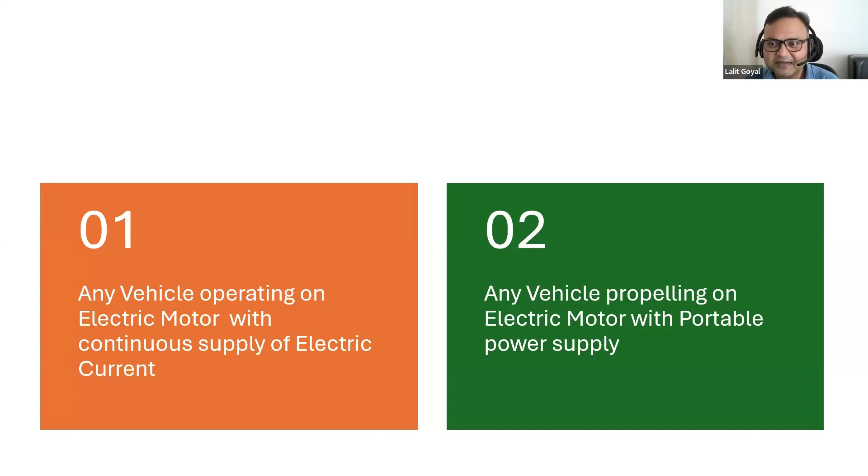Just understand, in physics, definition is definition, right? And the definition says any vehicle operating or propelling on a motor is an electric vehicle. That's how physics is, so the concept remains concept. Electric vehicles are there, and when they came to India, I'm giving you four options.

So this was the first electric vehicle which traveled in India. Now you have to guess. We don't cut any marks for guessing, so everyone is free to guess. Let's see.

Excellent. 1912, okay, excellent. Yeah, it is in Mumbai, that's true, it's in Mumbai. 1925? Someone has gone through Google, right?

Now, what is the limitation of these vehicles? How many of you can own them? I hope a lot, right? The challenge is they require a continuous supply of electricity. If you see the fridge or AC in our house, we give continuous electricity supply by connecting them to an electric source. So here, to give the electricity, we have to create an infrastructure, and that's costly. That's the reason everywhere in the world, governments own these vehicles. We can't own them.

So to surpass this limitation, what can you do? If you replace continuous power supply with portable power supply, can you do it? We have done it in telecommunication. Remember, till some years back we had phones with wired lines. After that, what did we do? We powered those phones with batteries, and today we have mobile phones.

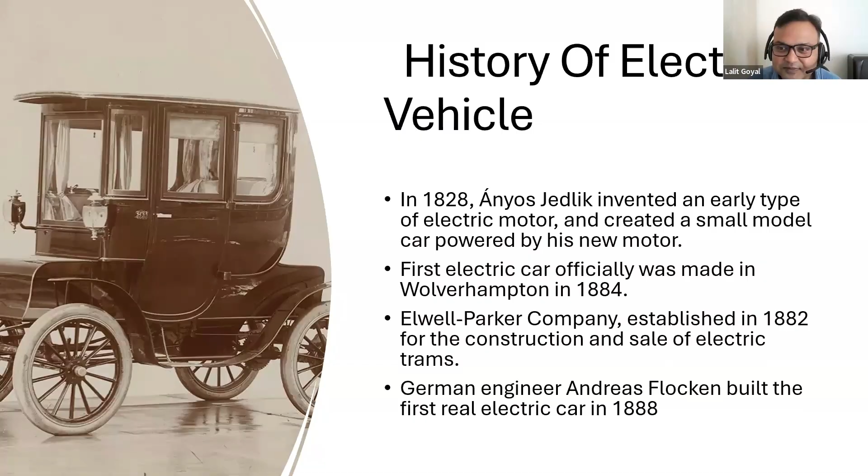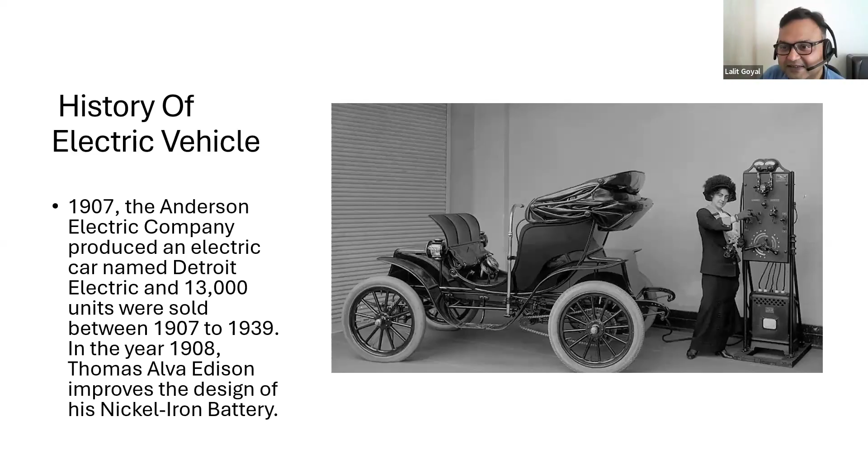So why we are moving to battery electric vehicle and why it's a future? Because a lot of challenges will come to your mind. Let's take a simple thing. Why electric vehicle, according to you, has made a comeback? Because some myths must be clear. A lot of myths are gone, right? Technically, you say electric vehicle, but it is a battery electric vehicle. We'll discuss that. And whatever training we do in battery electric vehicle or hybrid electric vehicle - electric vehicle is not our domain, yes or no? But we will say electric vehicle, right?

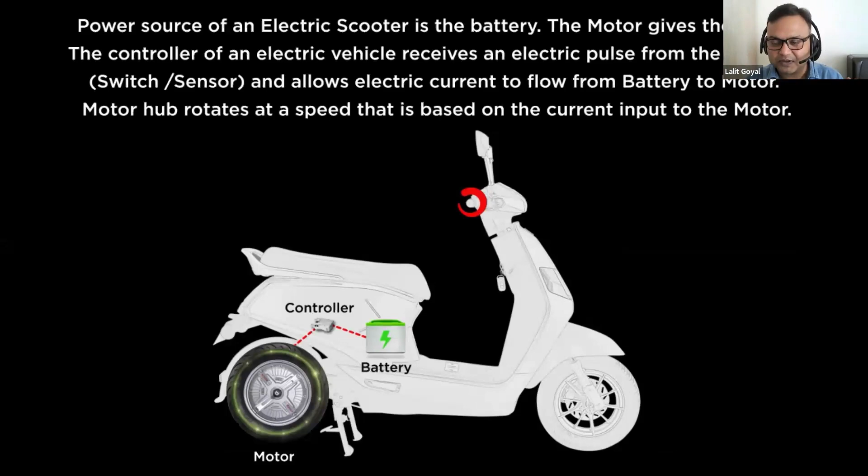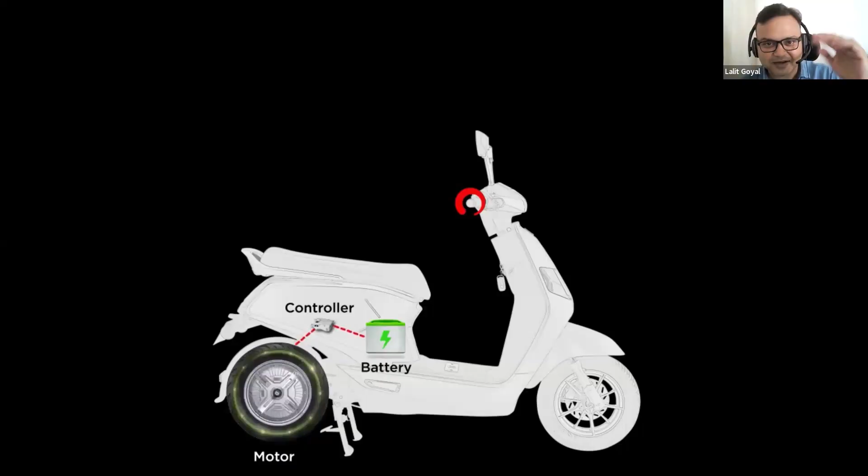Now let's understand what are the new age battery electric vehicles, and this video will technically help you understand where we are and what we are going to do. So I'm sharing this video with you. This is a battery electric vehicle from Mercedes.

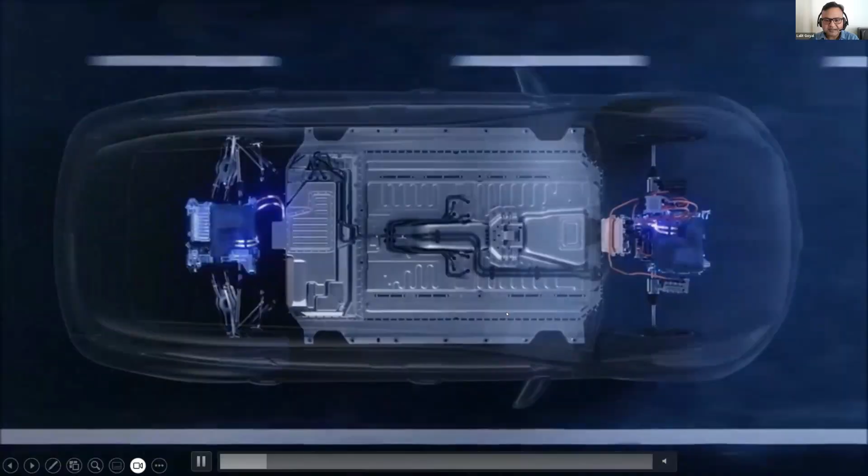Battery electric vehicles have electric powertrains, and the core component is the motor, which is there right now. This motor is powered by the battery pack. There's a cooling mechanism to control the temperatures, because when you use electricity, a lot of energy is generated, and with that, a lot of heat is generated. So we have a cooling mechanism to control the electric powertrain as well as the battery of these electric vehicles.

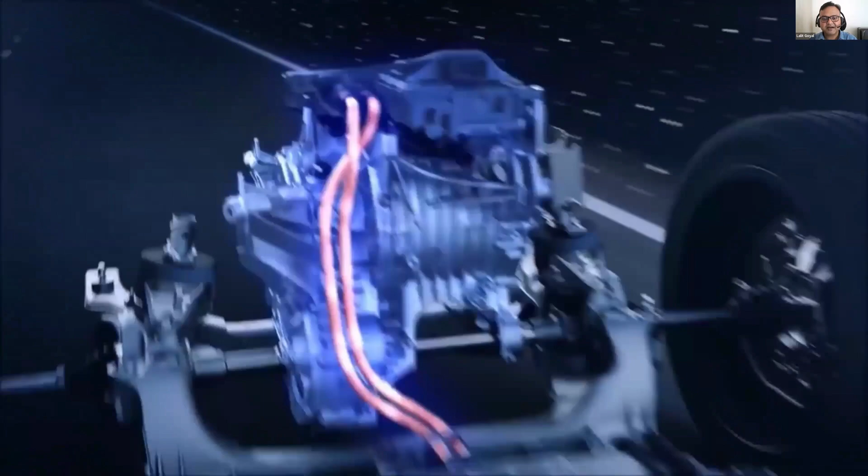So these vehicles today have reached a big level of maturity. Not only are they designed like this, even the battery which is placed there is placed in such a way that it lowers the centre of gravity of the vehicle. This electric powertrain has two motors - one is the front wheel drive, one is the back wheel drive. Combined together, it becomes all wheel drive.

And the best part is that you drive and you generate electricity also. There's a feature called coasting. When you do coasting, you can see around the vehicle is generating energy. So regenerative braking as well as coasting helps you recoup that energy and save it to charge the batteries. So even a loss of energy is harnessed.

These vehicles come with different cooling and heating mechanisms, and you can also select from different modes. So these battery electric vehicles today are coming with the most advanced technologies. Even if you see, to drive, you have acceleration 10 times more than your internal combustion engine. So these battery electric vehicles have new age technologies.

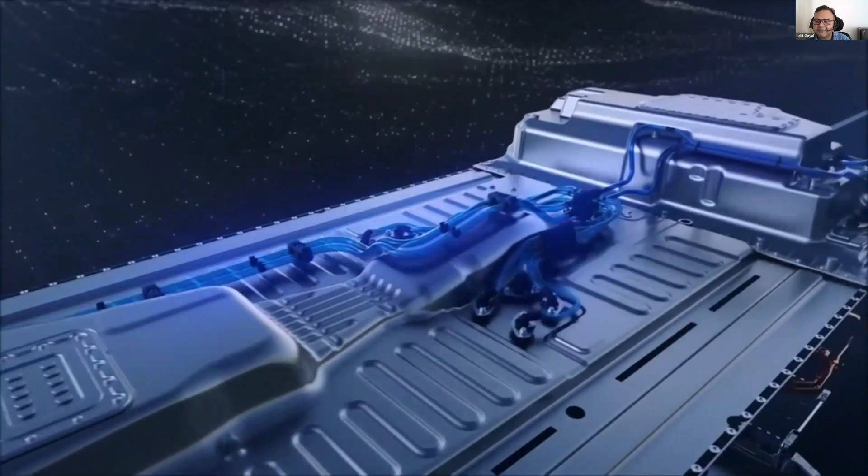So battery powertrain as motor, and we have today advanced features which technically use connected features for these vehicles. Now let's talk about the components. So it has a battery. To manage that battery, it has a battery management system. Charge port, because the battery requires current - in charging, we'll understand what is charging today. There are contactors for safety, a motor to propel the vehicle, and a motor controller.

How do you convert AC to DC? Every one of you has a battery at home, right? So when the electricity is there, the battery is charged, technically converting AC into DC. When the electricity is not there, what will happen? The battery is used to give you energy. But which component does that?

Which component does the conversion? It's the inverter, right? So at your home, have you ever wondered, the electricity supplies 230 volts, the battery's charge is 12 volts. So how does that 12-volt battery technically address the gap of 230 volts? No problem, we'll discuss that. And how your mobile technically charges with a 5-volt charger - that's all coming to you.

So let's start with a hybrid electric vehicle. So you all have eaten hybrid tomatoes, right? Yes or no? Hybrid tomatoes. What's the difference between a tomato and a hybrid tomato? Is there a difference? A bit, right? Not more, right?

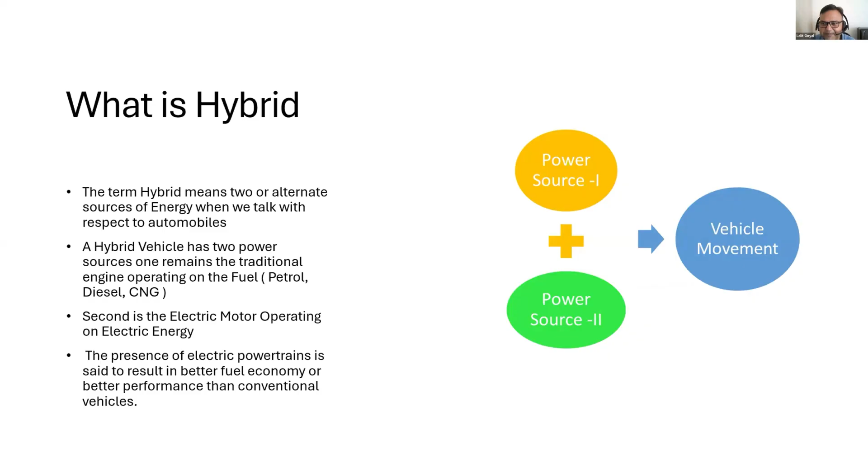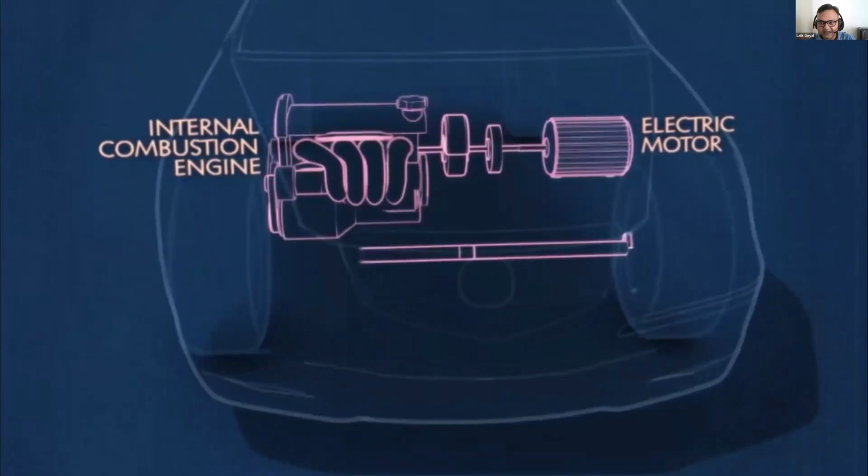Let's talk about hybrid electric vehicle. A hybrid electric vehicle technically has two powertrains. That means an electric powertrain, which is a special one - it takes energy from the battery, goes to the motor, and propels the vehicle. Second is the internal combustion engine, which converts chemical energy to mechanical energy to propel the vehicle. So when we say hybrid, it has two powertrains - you can see internal combustion engine as well as electric powertrain, with a lithium ion battery to it.

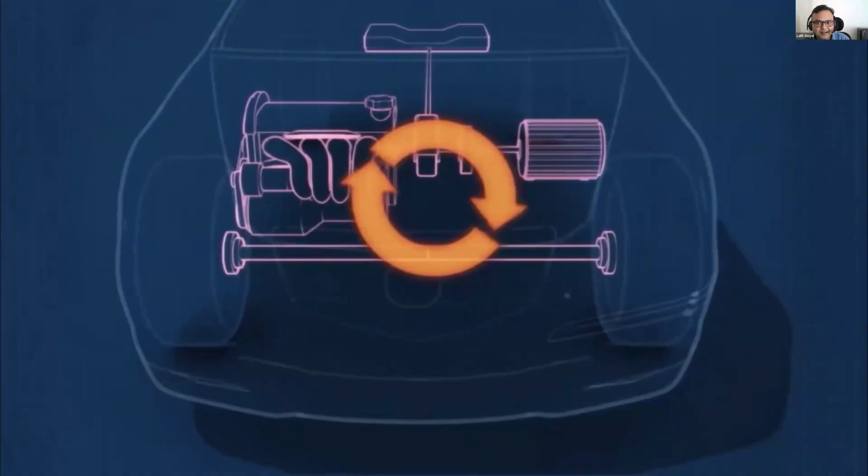Now, when you start your vehicle, there is a starter generator or alternator - technically that's a motor only. The battery of these hybrid electric vehicles has a very unique thing - it can be made mostly of lithium ion cells only. Today you will understand what lithium ion cells are. This battery is very unique because it is charged only by the engine. You can't do any home charging to it - maybe AC, maybe DC, you can't do any sort of charging. The engine charges the battery.

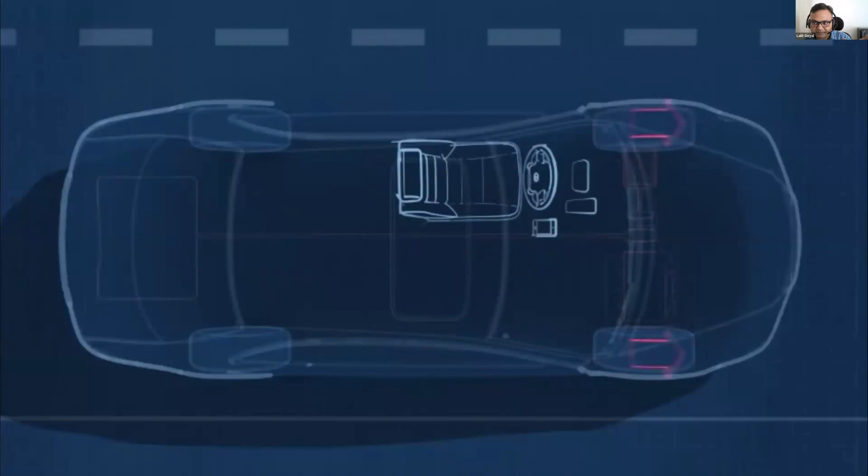Now let's understand the working principle - that's a very interesting thing. So the vehicle will start, right? The engine needs cranking, so your vehicle alternator does that when you start the vehicle. Here you have the electric powertrain, a motor with electric powertrain. So remember, every time the vehicle starts, it will start on electric powertrain. Point number one. Point number two, electric powertrain is 1/10th of the internal combustion engine, to make the vehicle stability more. Now these have a principle of working - if you see hybrid, you can't drive the vehicle at 100 km per hour. Different OEMs have set the limit of maximum range you can go - 3 kilometers, maximum speed 20 kilometers.

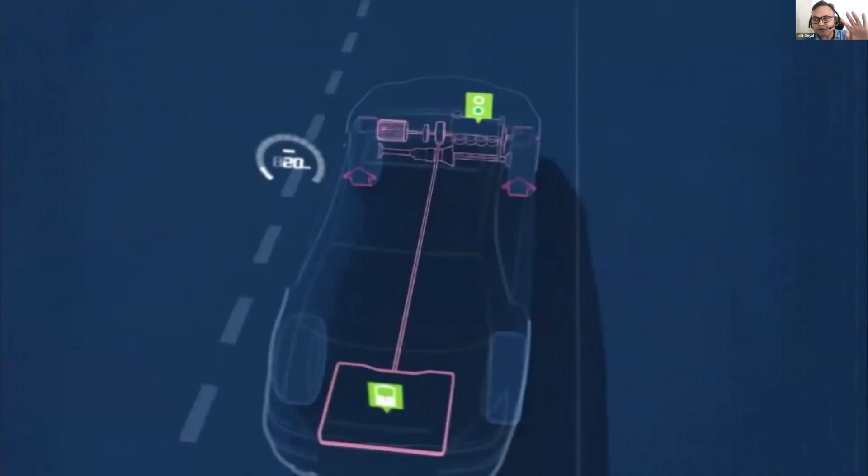Now let's take Toyota as an example. Here you are driving the vehicle - initially, the vehicle starts on electric powertrain. Once you cross 3 kilometers of range or move above 20 kilometers of speed, or the battery goes down, what will happen? The engine will take over. Now you can see the engine is propelling the vehicle as well as charging the battery, and when you require more power, you can combine both.

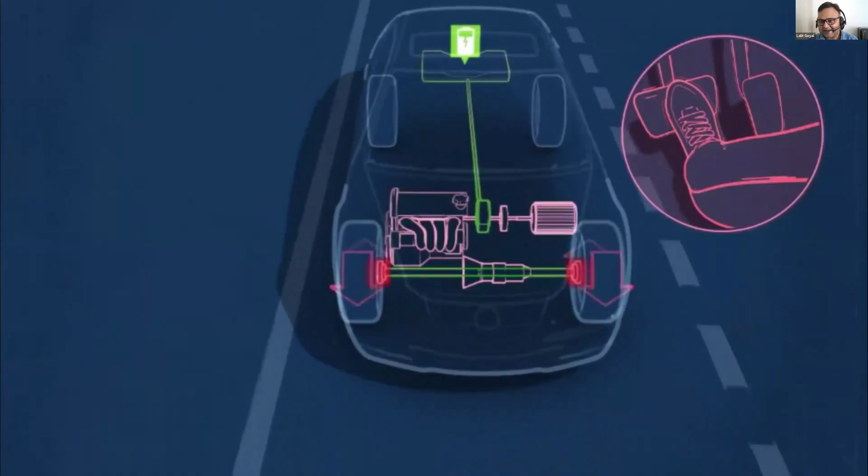What is regenerative braking? We are not talking about motors today, but the reverse of a motor is a generator - as simple as that. So regenerative braking technically helps you convert the lost energy into electrical energy, enhancing your energy while driving. So that's hybrid for you - it reduces the emission and addresses all the challenges that you have with battery electric vehicles. Any questions here?

Then hybrid, then we'll move to plug-in hybrid. Right. Right.

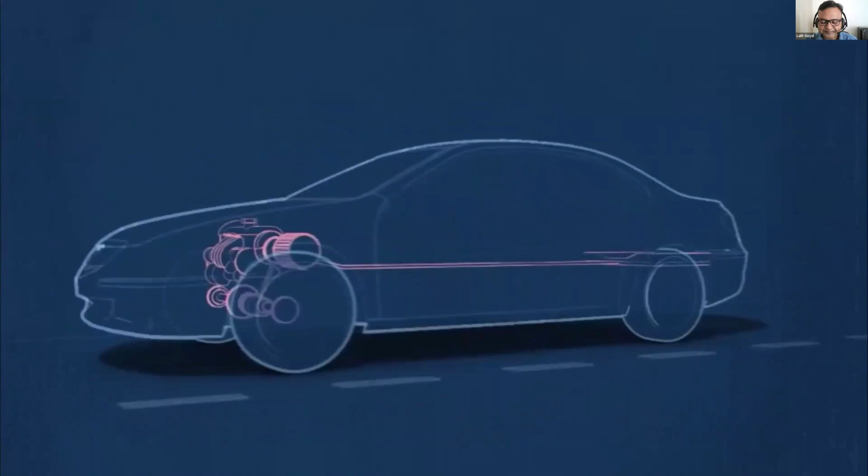Now let's talk about the second component, what we say is fuels. In hybrid, you have three different levels. So micro hybrid - have you ever heard the term micro hybrid? Today we have starter generators which technically aid the vehicle start and stop, reducing emissions by about 10%. Have you heard the term SHVS - smart hybrid by Maruti, smart hybrid by Suzuki, or smart hybrid by Mahindra? There you have a starter motor which technically supports the vehicle with engine start and stop, then regenerative energy as well as boost, because a motor always has better torque compared to an engine. So when you use motor torque aligned with the engine torque, you get a better torque, or we say refined torque.

And finally, the full hybrid vehicle where you drive the vehicle, regenerative braking, start and stop of engine. So now you understand why in a hybrid electric vehicle it will only start on electric.

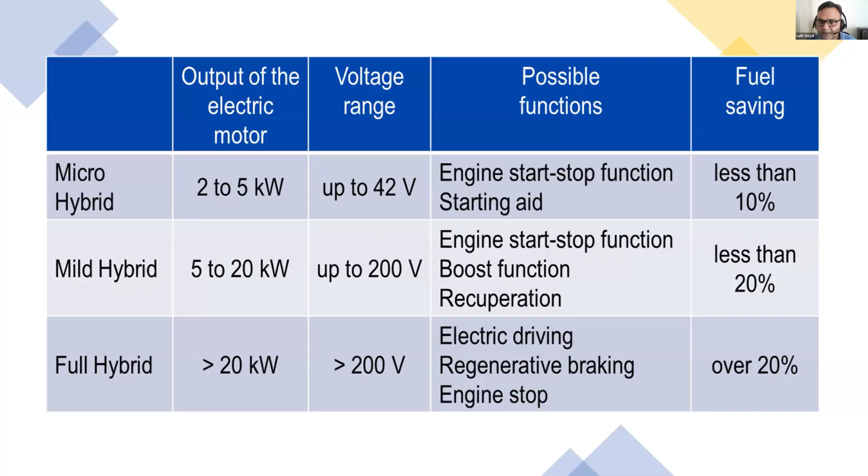The second is plug-in hybrid. In simple words, you have a lesser battery which can be charged by the engine. But if you increase the size of the battery and charge it by engine, there will be more effort and issue with the engine, so engine power will go down. So we do plug-in hybrid: you increase the size of the battery and the powertrain to be equal to the electric internal combustion engine. What you want to do is charge these batteries from an external power source, and these are called plug-in hybrids.

So plug-in hybrids are just like hybrids, but the difference is they are costly. Why? Because the battery size they have is equivalent to a battery electric vehicle. This Kia plug-in hybrid has a 20 kilowatt battery pack, while the previous car was having a 5 kilowatt battery pack.

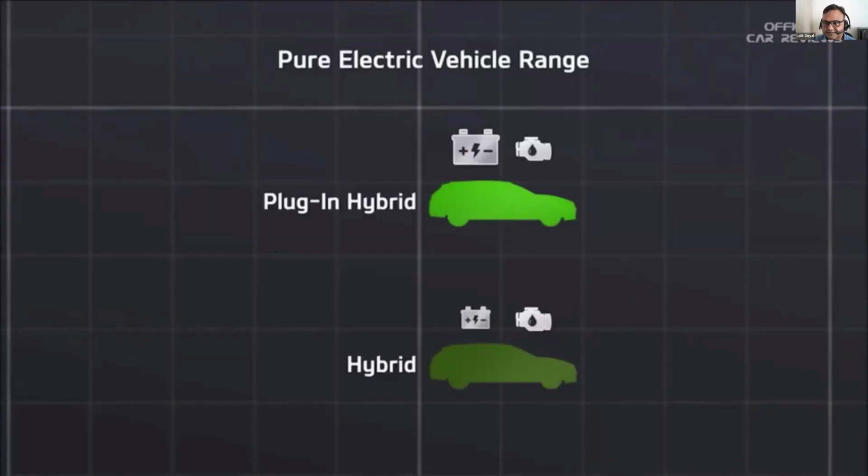So that means if you can drive 5 kilometers on hybrid, in plug-in hybrid you can drive for 50 kilometers. In hybrid you had a limitation of going up to a top speed of 20. Here you can go up to 50 kilometers and drive at 100 kilometers per hour.

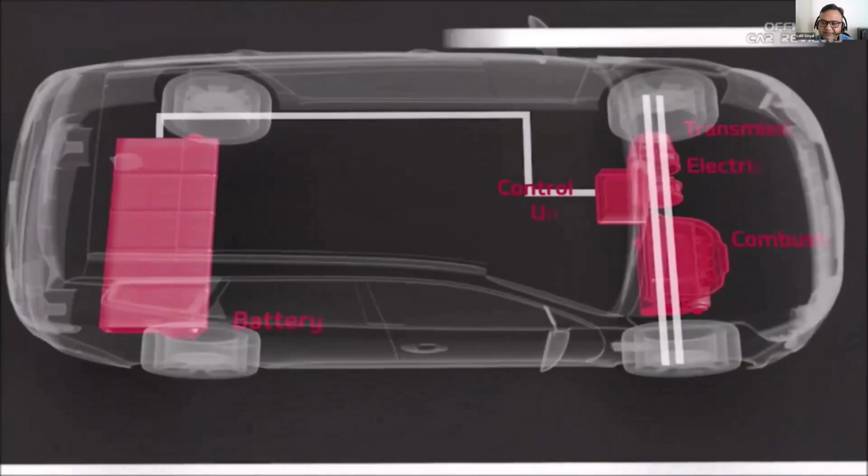So it's more of a battery electric vehicle coming with an engine which supports you during a breakdown. Rest everything remains same. These vehicles behave more like a battery electric vehicle than an internal combustion vehicle. The engine only comes into picture when the battery goes down, or you need torque assist. So it behaves more like a battery electric vehicle compared to hybrids, and that's why we call them plug-in hybrids.

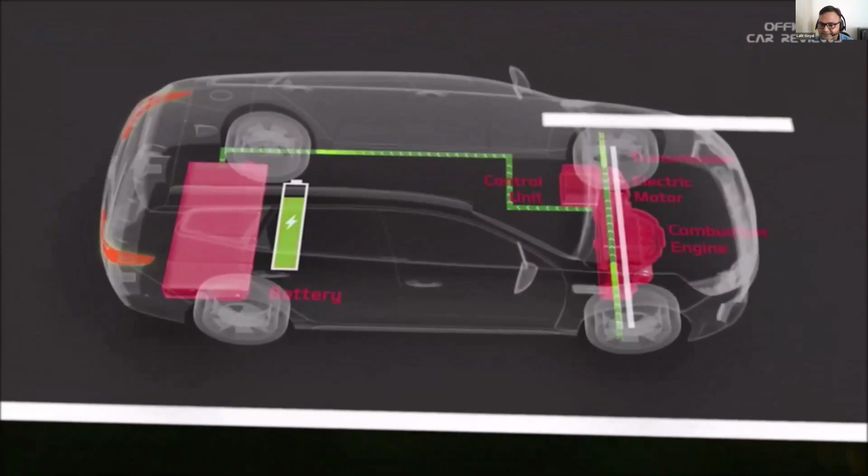Now here you can see the battery has gone down. The engine is propelling the vehicle as well as charging the battery. So that's plug-in hybrid for you.

And you can charge these vehicles from the 15 ampere sockets that you have at your home. Do you know 15 ampere sockets? You put the air conditioning system and refrigeration on that. So you can charge by that, as simple as that. Or you can do public charging as well.

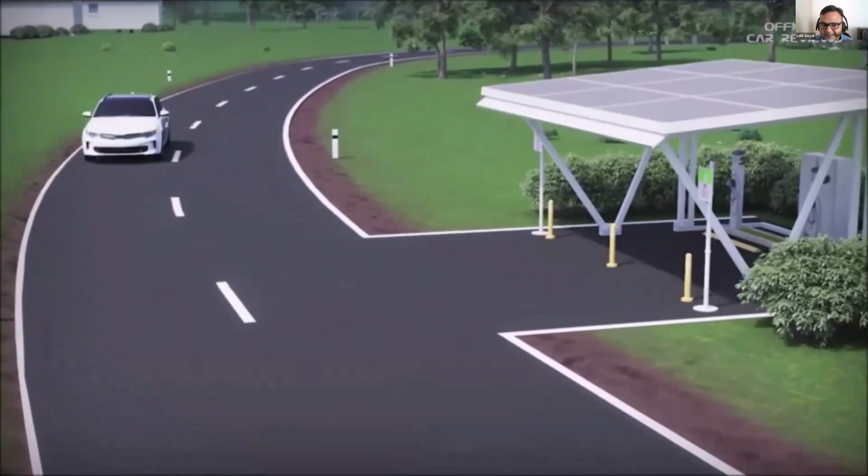Now let's move toward energy which is 100% pure and clean. Let's talk about fuel cell.

You have heard about hydrogen vehicles? A lot of hype, and one of the ministers in India is driving that — the road minister who always says something. Now, hydrogen is readily available everywhere, plenty of it, but not in the pure form. Where do you find pure hydrogen? The Sun. If you have pure hydrogen on Earth, the temperature would be somewhere around 17,000 degrees. A challenge? Hydrogen is highly flammable, that's the reason it's not available in the purest form.

But H2O is hydrogen plus oxygen. Now this energy is the cleanest energy on road.

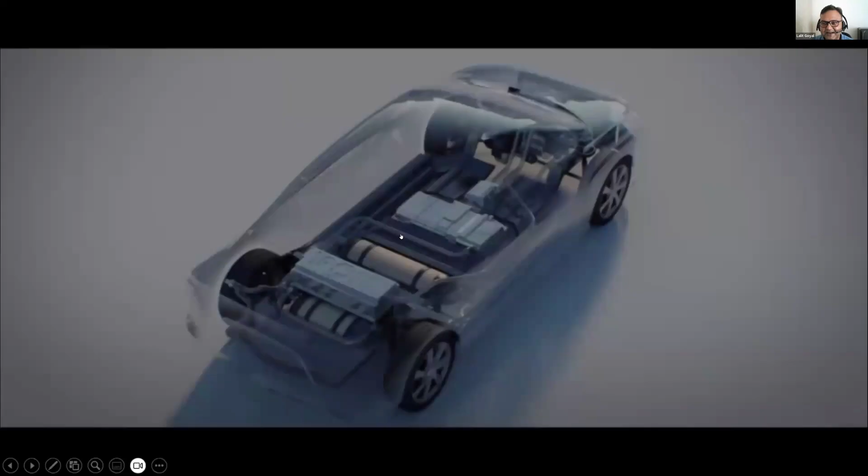Okay, let's talk about these technologies. So this is the fuel cell electric vehicle, also called hydrogen fuel cell vehicle. The technology is excellent — hydrogen plus oxygen equals water.

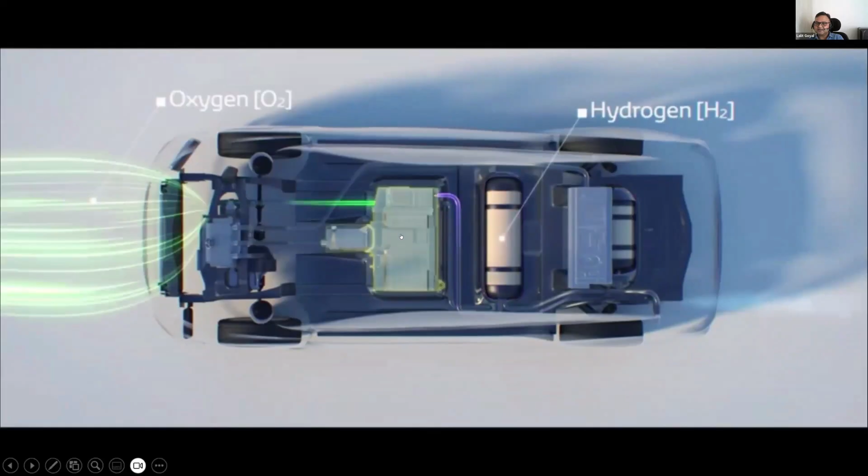So you store hydrogen in tanks, along with a lithium-ion battery, fuel cell stack, and motors. This vehicle technically takes hydrogen from the cylinders and oxygen from the atmosphere, converts it into electricity, and the exhaust is water. Since the exhaust is water, technically it's 100% clean energy with no emission whatsoever.

And for hydrogen, you can do electrolysis — you put current in water and hydrogen is liberated. So you can create hydrogen anytime, anywhere. Now you store that hydrogen in these cars.

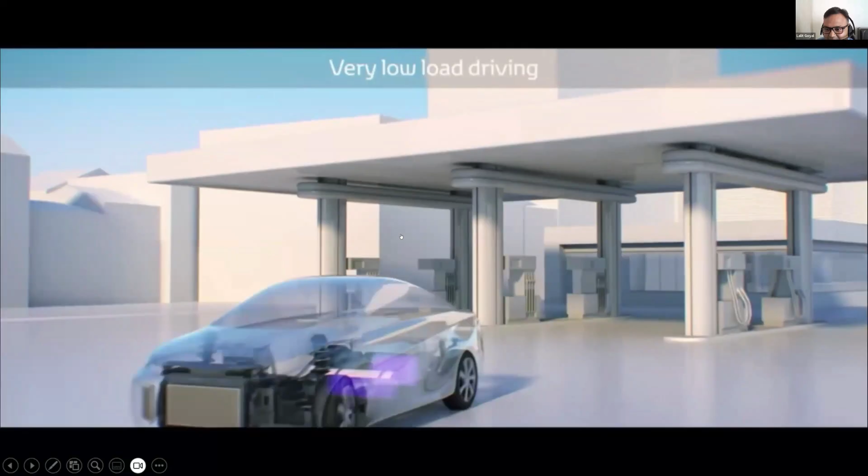As I said, this is a hybrid electric vehicle. It works on the electric powertrain, starts on electric powertrain, and has regenerative energy. Now over time, as in hybrids, when the battery power goes down, the fuel cell stack will come into picture.

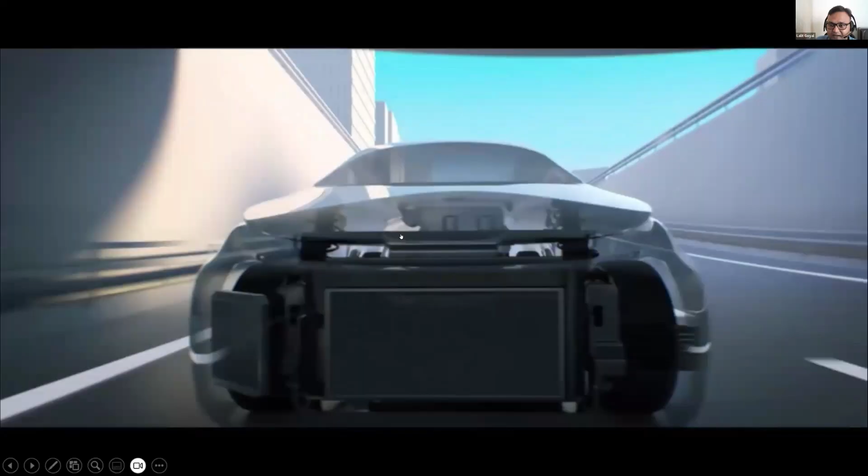Now when you see this fuel cell stack, what happens is it creates electricity to propel the vehicle as well as charge the batteries. This fuel cell stack is creating energy which charges the vehicle as well as the battery. If you have high load driving, you can use the motor — two motors, one electric and one from the fuel cell stack, combine together to create better torque to propel the vehicle at inclines. So there's no energy loss. Now let's see how this fuel cell stack technically works.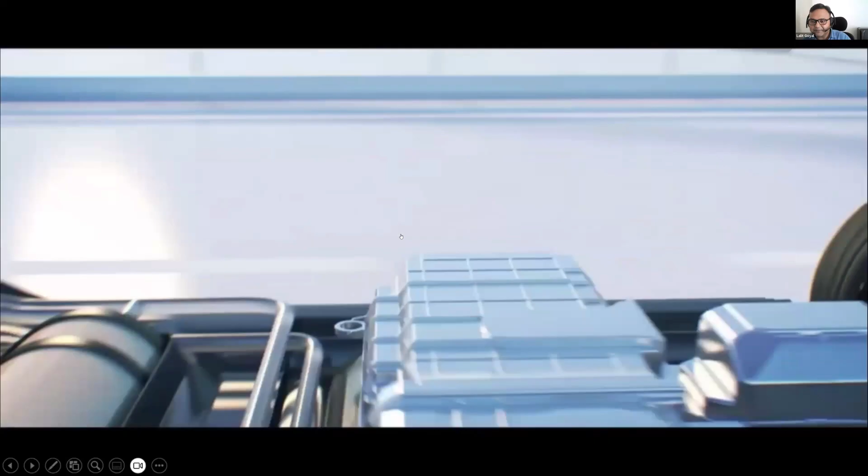No. This hydrogen in the atmosphere is highly flammable, right? So what you do is add oxygen to it. And when hydrogen and oxygen combine, what does it become? The prime source of life, water, right? So that's the reason we say hydrogen is 100% clean technology.

100% clean technology. Now let's talk about the most amazing thing we are looking for, which is the solar electric vehicle. Let's see what it is.

This solar electric vehicle, when you say it, is a normal vehicle just like our vehicles. The difference is in the frame. So right now this vehicle uses 330 solar cells. And we all know the efficiency of solar panels is 15%. So this car can self-charge for a 30 kilometer a day range.

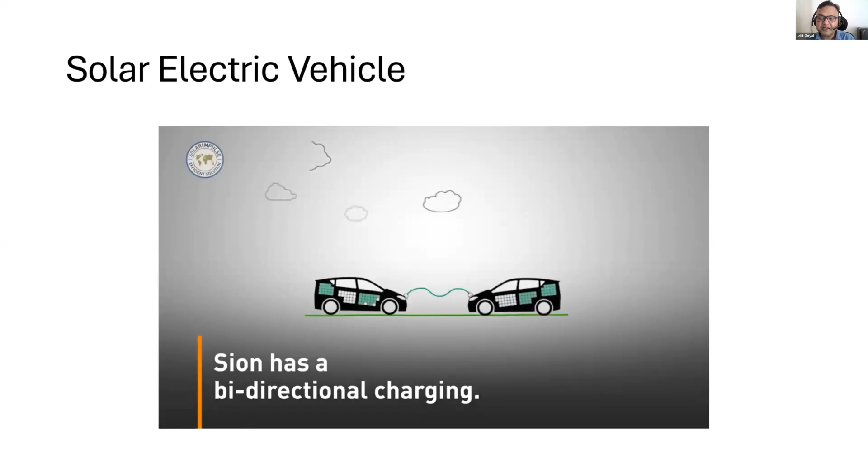With a total battery of 50 kilowatts, this car can be charged continuously in the sun for 8 hours, 7 days a week. In one day it can charge for 30 kilometers, meaning you can do one side of a trip, right? And you can charge the battery with an external power source. You can use the battery of the same car to charge another car also.

It's called vehicle to vehicle charging. And these cars come with a different set of eco sustainability features, just like an organic support system or warmth control system, right? Because it's made in Germany, where the temperature is cooler, that's the reason they have it. Here we have the gel technology to keep the car cool.

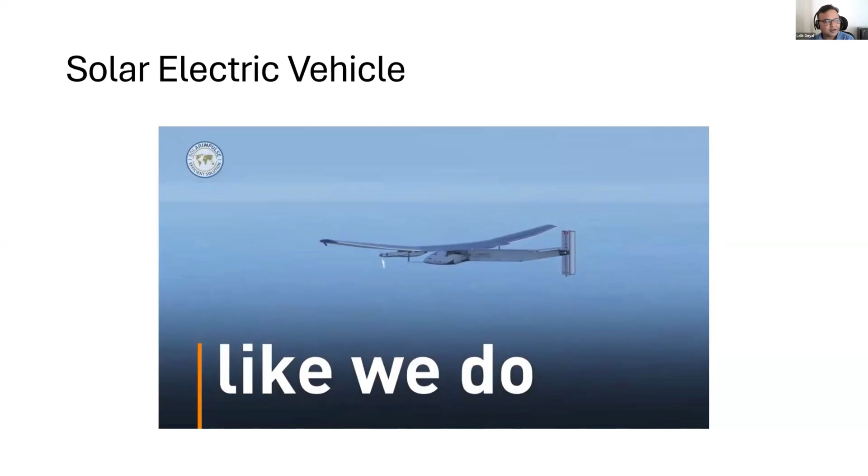So this car is commercially viable. It's called Sion and it's already available in Germany to purchase. And they're not only making cars, they are making planes, they are making ships, right? Everything is already available for the market.

Now let's move to the lithium part. What is lithium? You can see on the screen, this is the purest form of lithium, 92% pure lithium. How does it look? Just like silver, right?

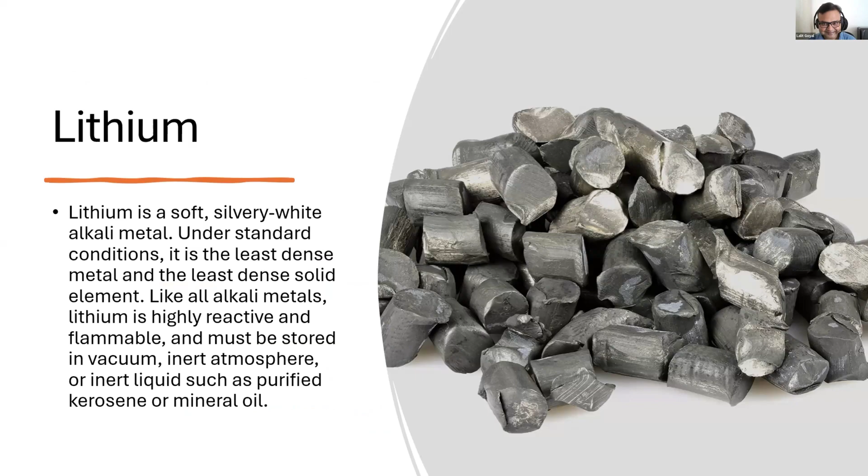But what do you know about lithium? Lithium is the most reactive element. Hydrogen is the most reactive gas. And how reactive is lithium?

Now I'm using kerosene oil to keep the lithium. Lithium is very soft. If the purity increases, the softness increases, right? So technically you can cut it without a sharp edge device.

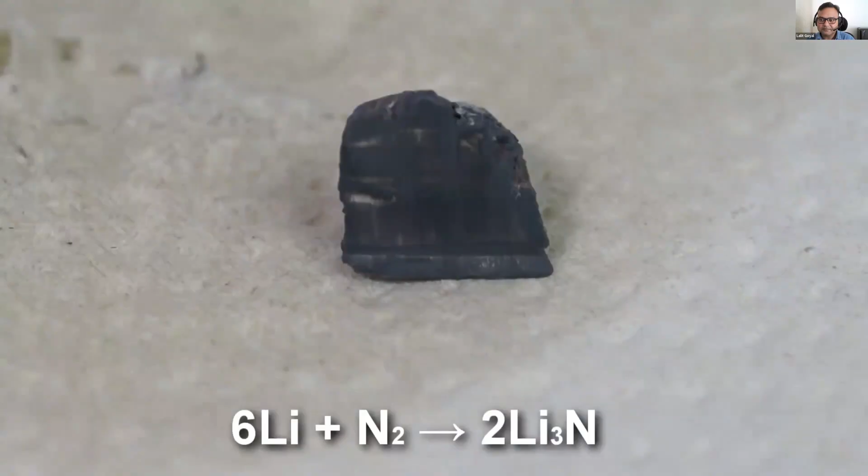But if you keep pure lithium in the room, what will happen? It will start reacting with the room's nitrogen, and after 2 hours you come back and there is black powder. Where is the lithium? Gone in the air. That's the reason I always keep lithium in kerosene oil.

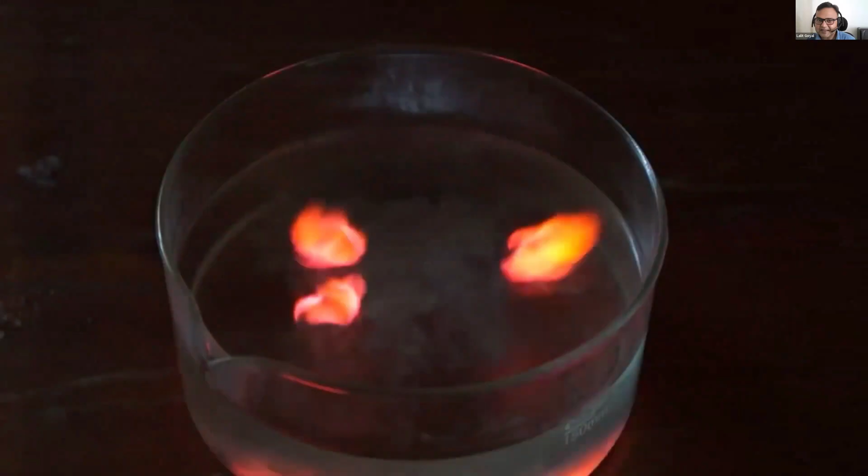Now, when there is a fire, what do you do? Put water. But when there's a fire in lithium, if you put water, what will happen? It will release hydrogen, and hydrogen is flammable. That means if you put water on a lithium fire, you increase the fire instead of decreasing it, you increase the fire. And the best cracker is that, right?

So we are trying to burn lithium here. You can see it's burning the metal, which is the furnace. It's burning the stand. It's burning aluminum, copper, tin together. So it can decrease the melting temperature of other components. And that's the best thing about lithium fires, right? So when an automobile gets a lithium fire, you don't have anything left for a forensic test.

At 2000 degrees, your sand becomes glass. But if you put lithium with it, in 3.3 minutes it will make glass out of it. So that much reactive is lithium. Don't try this yourself, I've done it for you. But do we have enough lithium globally?

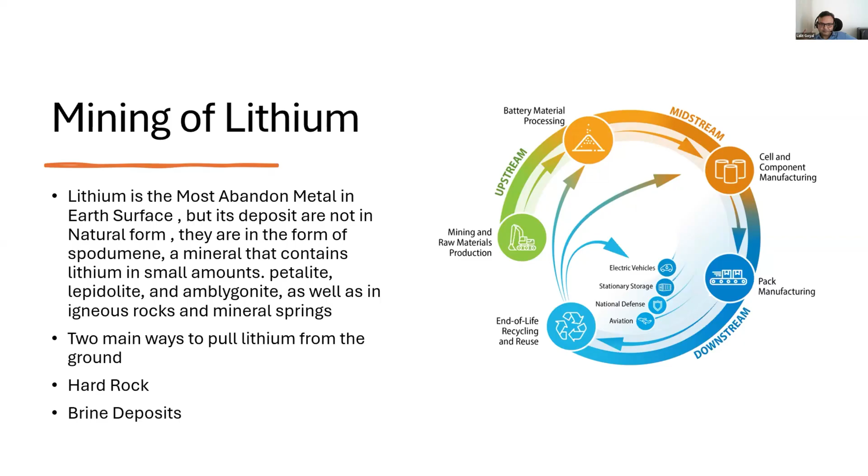Lithium is available in two different forms. One is in the brine form, as a liquid inside the earth's crust. Second is in the form of hard rocks above the earth. So we technically mine it.

Right now, if you see here in this image, what we are doing is pumping the brine which is inside the earth's crust. The brine that we pump from the earth's crust by drilling, we bring it out and put it in front of the sun.

Then we technically increase the temperature. Sun radiation increases the temperature. Over time, we reduce the humidity or moisture content, take the lithium carbonate out, and let the solution go back inside, the brine go back. Technically, this is how it's done.

Now, these are the bigger mines. If you see, this is Chile. This white powder is all white gold, or we can say lithium carbonate. Because lithium is 100% reactive, it is not refined more than 6 to 7%.

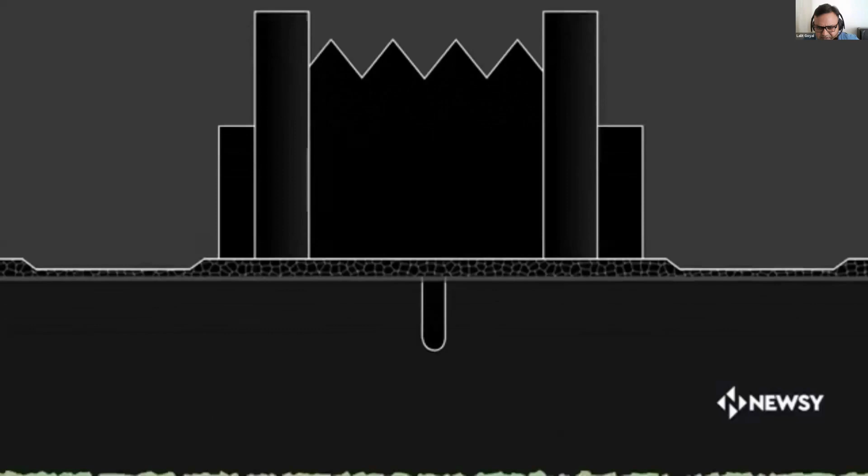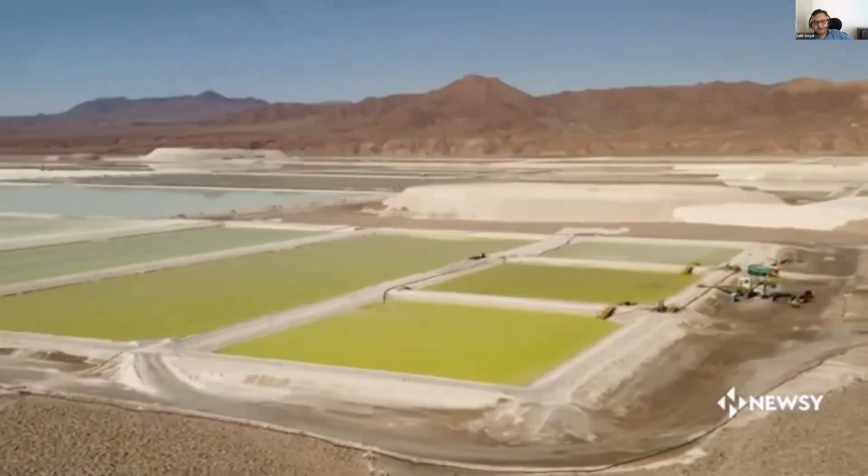Technically, we change it once that color changes, and a lot of water is used here. Now this crystallized form of lithium is taken over, then it's sent for refinement wherever you want to make the cells. Because the transportation of an unrefined thing is more convenient, easy, and safe.

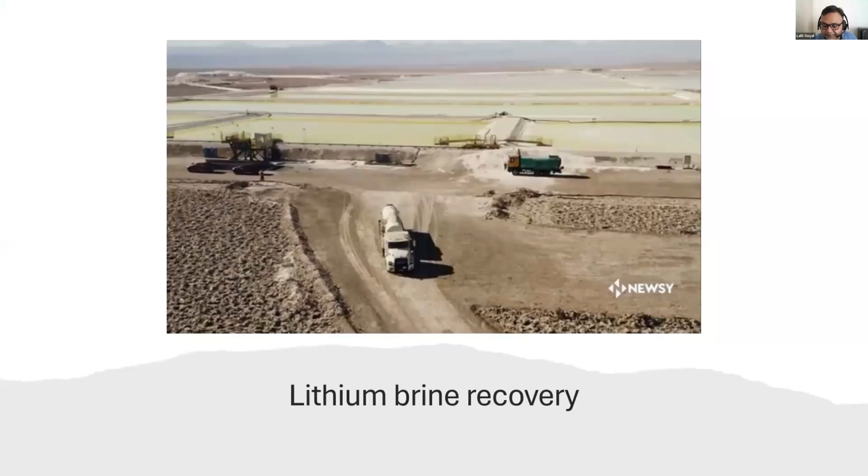Then let's talk about the second form, rock extraction. We will not go deep here. Technically, what we do is initially bring the salt rocks, then break the rocks into smaller particles, maybe 2 mm or less. Then we wash those particles. Here you see we are using first a rolling machine.

Now in this rolling machine, we are putting the rock powder, then further refining it through a hammer mill and reducing the size to 2 millimeters, because we have to remove lithium carbonate.

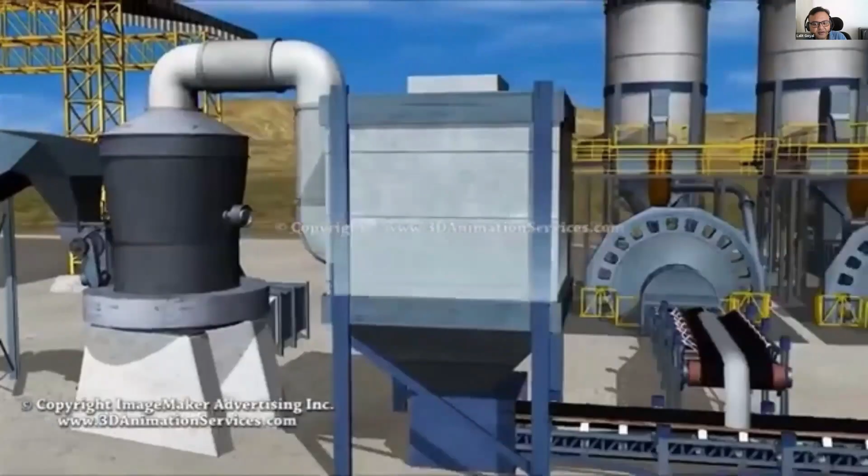So when we get it, we wash it thoroughly with water so we can remove the impurities and the sand. Once washed with pure water and impurities removed, we add different agents to it so we can further remove impurities. Spodumene and dolomite are two agents that are technically added to it in this ball mill.

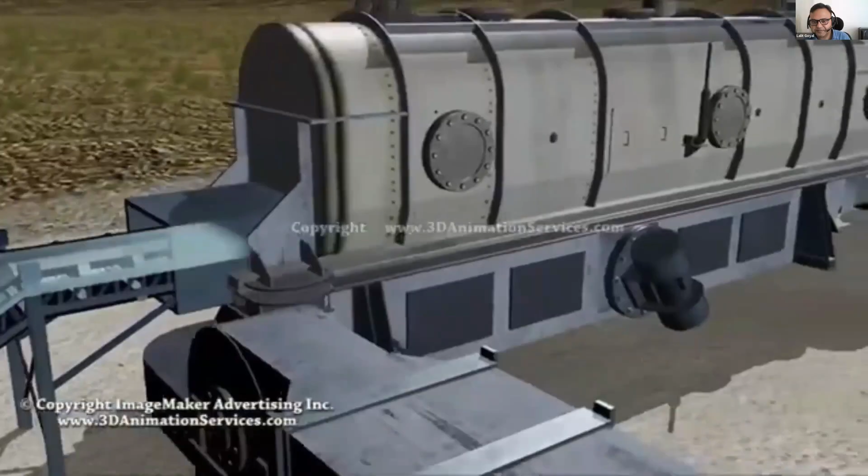Now we will technically first heat this arrangement, make granules out of it, and then heat those granules so we can remove the carbonate part of it. Now they are technically going through a kiln. We are removing the moisture. Now they are technically like crystals.

Then these crystals will further go through a kiln again, where we are technically removing all the moisture which is there. Now they are becoming more like marbles. Then we will technically cool them down.

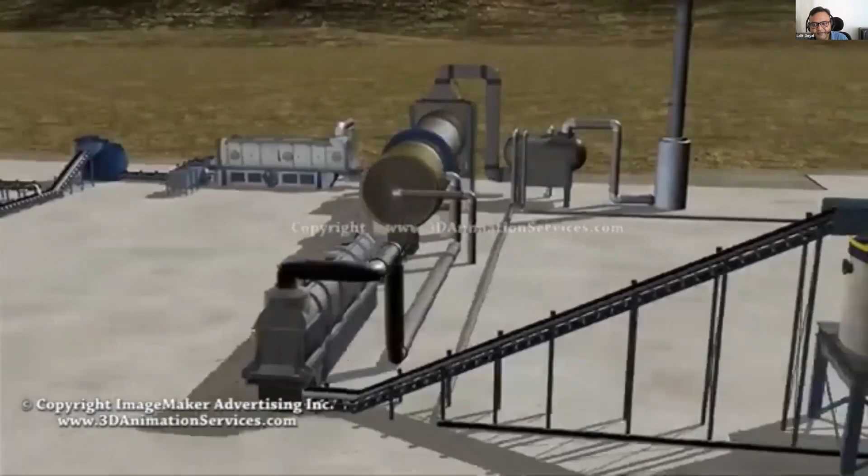And now we have three different components. Further, we will use three different agents, calcium, magnesium, and mix it so we can technically create lithium carbonate. And lithium carbonate is what we are looking for, because lithium carbonate can be transported. But lithium itself can't be transported, because lithium is highly reactive.

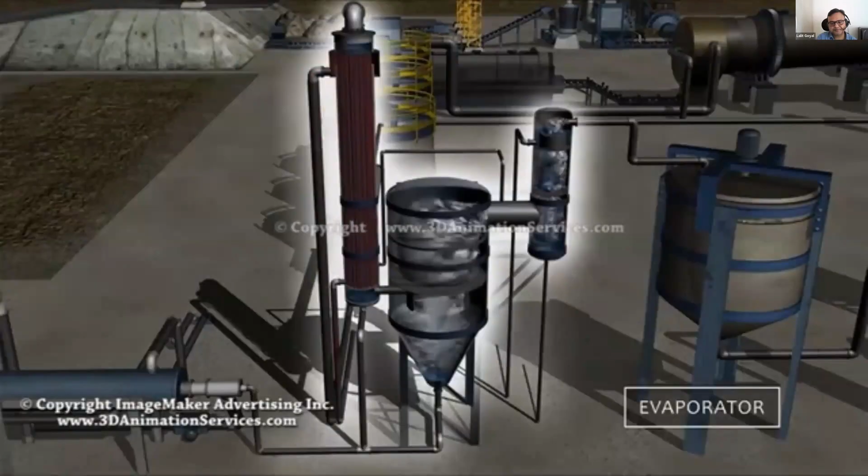So now you have the available powder. You will first recreate it in crystal form so that you only have the carbonate part, and then you pack it down and it's ready for distribution.

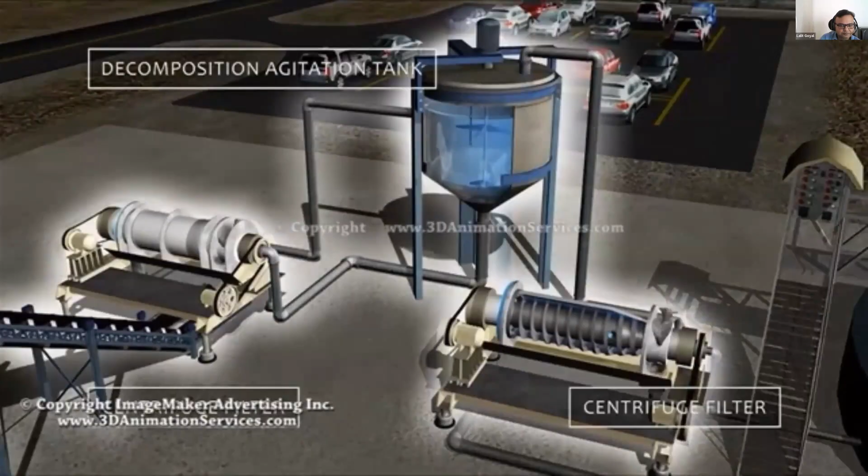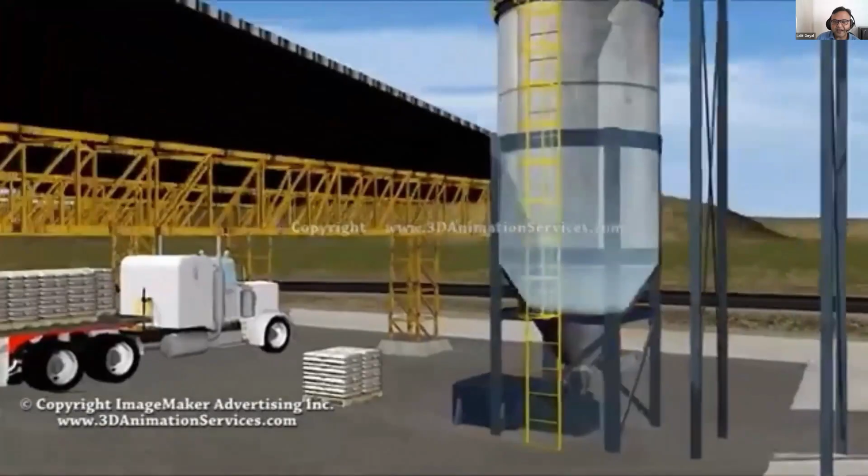Okay, so that's how technically you get the lithium. So we have lithium in India, right? We all have gone through the news about lithium in India. How many have gone through that news? There is lithium in India.

Sushil, huh? What about others? When we have lithium in India, then why aren't we using that lithium? We have lithium in India, right? Then why can't we use it?

Lithium is creating fire, but why is it creating fire? To understand, let's understand how a lithium ion cell is made. So we know lithium is highly reactive. Now, to reduce the reactivity of lithium, what we do is we add different metal oxides to it. So technically we are using different metal oxides.

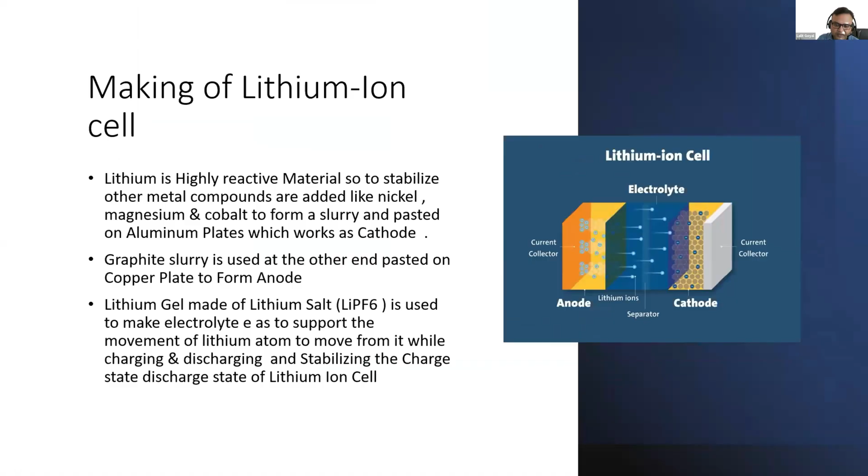Like you have heard NMC cell, LFP cell, NCA cell. Now what are they? They are all made of different metals that we use to make the cathode with lithium. So because we are adding different materials, we have different properties of these cells. Now, technically, how a lithium ion cell works is we create a cathode to reduce the reactivity of lithium.

The electrolyte is made of lithium. So when you charge, what will happen? The lithium will move from the electrolyte, and the electrons will move from the power source. You can see this. So at cathode and anode, the lithium and its electrons are there with a bond.

That's the reason a lithium ion cell phone does not discharge, right? You manufacture it today, after 2 years you open the phone, and boom, it's working. Yes or no? Right? So lithium charge is a stable thing, and when it discharges, it will move from the electrolyte again.

Now, if the temperature goes beyond 60 degrees Celsius, what happens to this cell? The electrolyte will evaporate and the lithium will move freely. Electrons will move freely. When electrons move freely, what will happen? Boom. Uncontrolled energy, it's a bomb. So technically, don't take the temperature beyond 60 degrees, right?

You have electricity, you're using electricity for your life, but do you ever touch a naked wire? No. Same thing with lithium: understand that above 60 degrees Celsius, the electrolyte goes away, and then there is uncontrolled energy because of the movement of electrons. They collide, and because of that, the cell bursts.

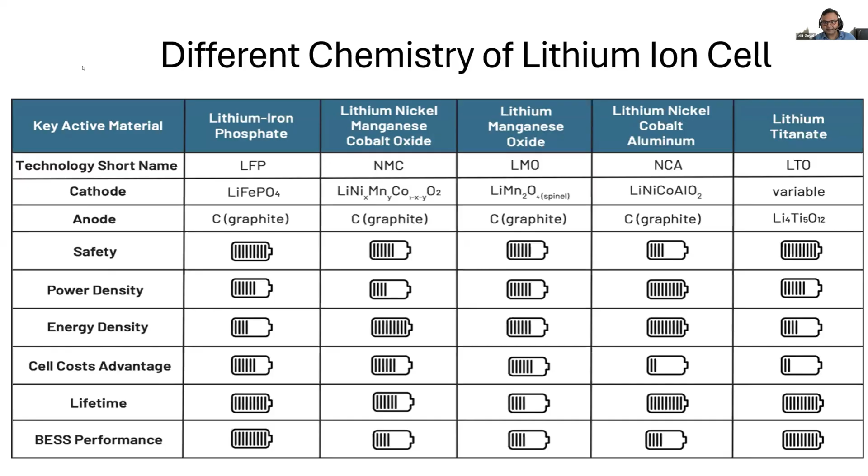Now, how you charge these cells becomes an interesting thing. So what is charging? We all do charging, right? Can anyone tell me what is charging?

You all do mobile charge, laptop charge. Just understand, it's very simple. The available current is AC, alternating current. The current which comes to your home or office is alternating. To charge, you convert AC into DC because DC current can be stored, AC current can't be stored. So charging in a nutshell is a process to convert AC into DC.

Now the most amazing thing is, how many charging technologies are there? This word is very interesting in itself. You have four: conductive charging, inductive charging, mechanical and flash. I hope no one has heard these terms before, right? These are technical terms, not layman terms.

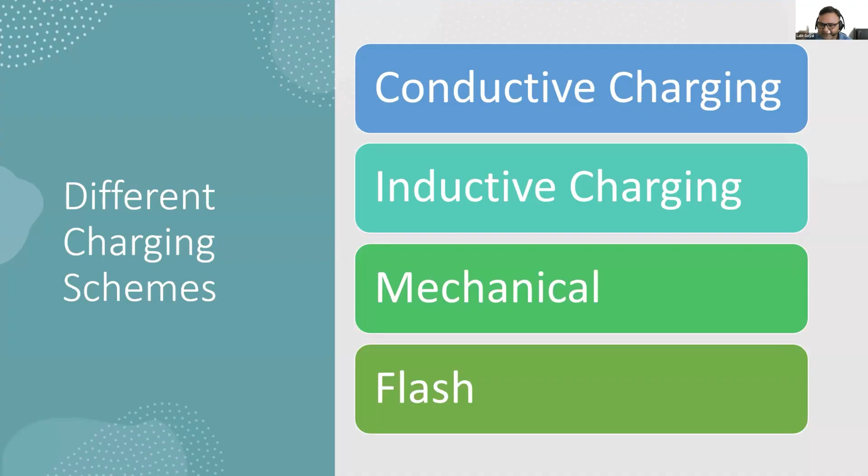Now see what the layman term is. In conductive charging, technically you connect the vehicle to the charger manually, and in this you have AC and DC. Now what is AC charging and what is DC charging? Go through this image, you will understand. This was from my intern days at Tesla, so I've taken it from there.

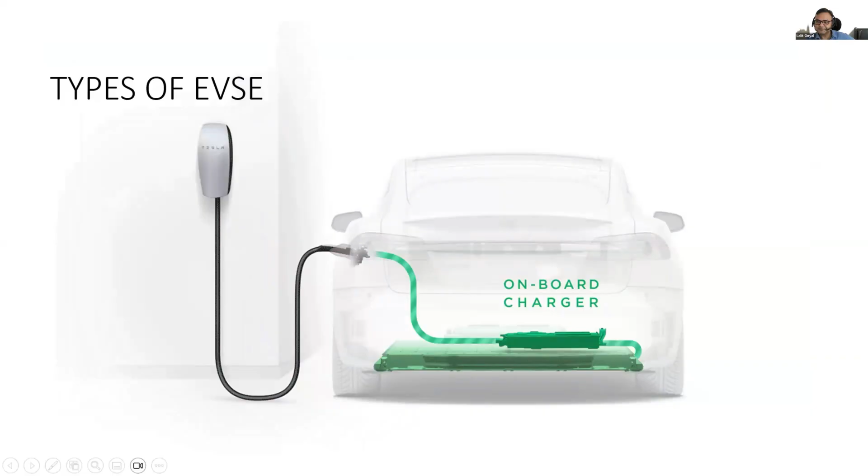Do you see a difference? Yeah, there is a difference. When the small charger is there, the onboard charger comes into the picture. When the bigger charger is there, the onboard charger is not in the picture. This is why the vehicle has an onboard charger. So when you feed alternating current to the vehicle, someone has to convert it into DC, so that the current can be stored in the form of DC inside the battery packs. So you have an onboard charger.

This onboard charger is 3.3 kilowatt. You can increase the size of this onboard charger, you can make it 7, 10. Today companies are doing it because initially the battery was 10 to 20 kilowatts, so 3.3 was enough. Now it's 60 kilowatt, you are using 7 kilowatt. We can make 20 kilowatt, 40 kilowatt, not a challenge. So what an onboard charger is doing is converting AC into DC inside the vehicle.

Now let's do one thing: instead of increasing the size of the onboard charger, let's increase the size outside. Because if you increase the weight inside the vehicle, the vehicle size will increase, which will technically impact the vehicle range. So now you convert AC into DC outside the vehicle, and you directly feed the DC current to the battery. So you have surpassed the limit of AC current, yes or no?

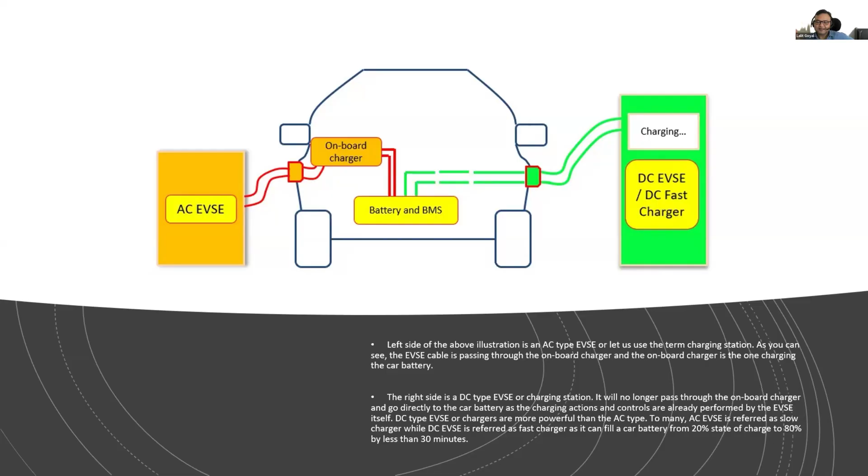That's the reason we call DC as fast charging, AC as slow. So technically in India we have three modes. One is AC level 1, where you technically charge your vehicle with a 15 ampere socket at your home, so one side is a vehicle gun. AC level 2 is a dedicated connection. A lot of you don't know how much electricity is coming to your home, because in India we have sanitization for hot water but no sanitization for electricity, since our parents never understood an electric vehicle was going to come.

So 15 amperes into 230 volts is 3.3 kilowatt in a nutshell, and that 3.3 kilowatt is not free. A fan is running, a laptop is running, an AC is running, and you are using the same current for vehicle charging. So the maximum output is 1 kilowatt. Today Tata Nexon comes with a 30 kilowatt battery, and you are charging the car with 1 kilowatt. How much time will it take?

Just 32 hours. So that's the reason today, if you buy these cars, you get a special charger, and you call the discom where you pay the electricity bill. They will come to your home and install a special connection. Remember, whenever you need a connection for charging, contact the discom where you pay your bill, because in India we have a number of discoms, or you can go to FAME 2 where they can tell you how to get the connection. They will set up a connection at your home, and the maximum connection provided at home in India is 15 kilowatts. So up to 10 kilowatts you can have the charger.

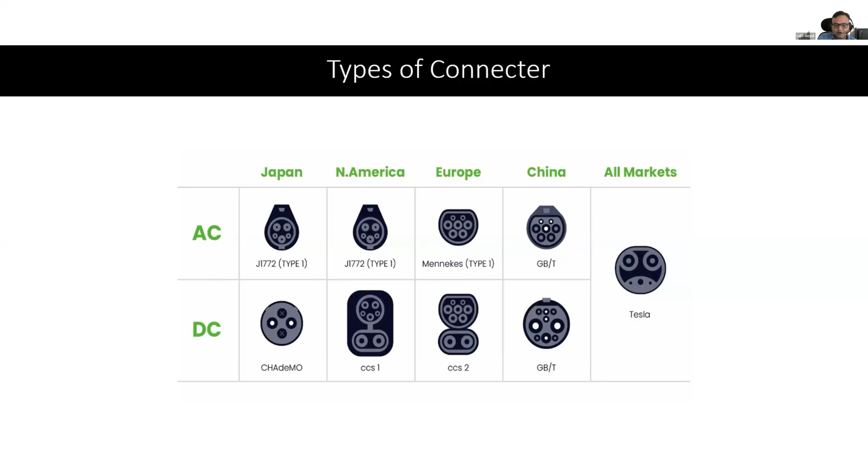Then comes DC fast charging. DC fast can give you 20, 30, 40, or 50 kilowatts of charge, depending on the capacity of your vehicle battery. And there are different connectors to it. AC has J1772, Yazaki, type 1. Then there's Mennekes, type 2. Then GB/T, which is a Chinese one. Globally, and in India, type 2 is used. Worldwide it's type 2.

That's a handshake. Whenever you connect an AC charger or a DC charger, the current doesn't pass at the start. There's a handshake happening called proximity pilot and control pilot. Basically the vehicle knows the charger is there, the charger knows the vehicle is there. They combine, share some communication, and then the charging process starts. 100% safe - anyone can charge. There's no chance of electrical accidents. Has anyone of you heard that someone died because of charging a car?

It's 100% agile technology. Even if you use 50 kilowatt or 100 kilowatt, nothing is going to happen. Second thing is, what is the capacity of the vehicle battery to be charged?

So the second one is a DC charger - this is the AC charger which I'm showing right now. In DC, again, you have 4 technologies: Combined Charge System, CHAdeMO, Tesla, and GB/T, which is a Chinese technology. So technically in India we are using CCS2, Combined Charge System 2. You can see CCS2 and CCS1 - we'll talk about that. CHAdeMO is a Japanese technology, Tesla is a proprietary technology, and GB/T is a Chinese technology.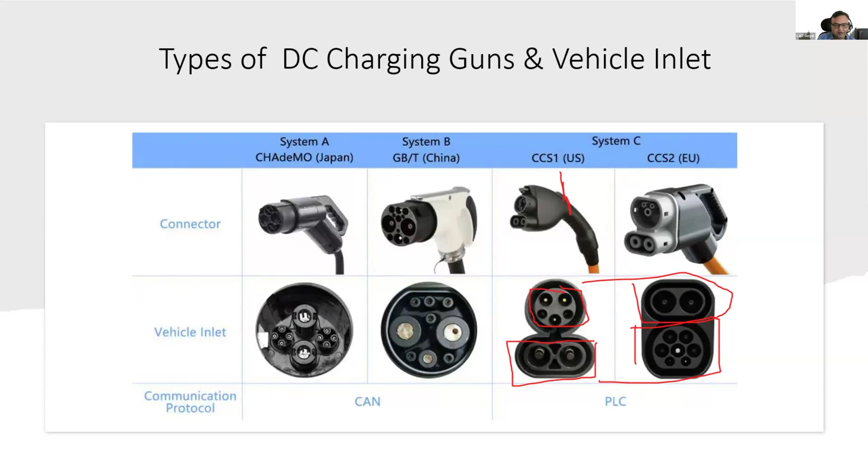Technically, nothing has changed for DC. What has changed over the years is that previously batteries were smaller, so we used single phase charging technology. Today batteries are bigger, so we use 3 phase. In DC, nothing changed. So that's the technical difference between AC and DC charging here. That's the reason we call it Combined Charge System. And if you see here, the CCS1 and CCS2 connectors are different on the AC side, not the DC side. Correct?

Now, can you charge your car wirelessly, without connecting a wire? Can you charge the car's batteries that way?

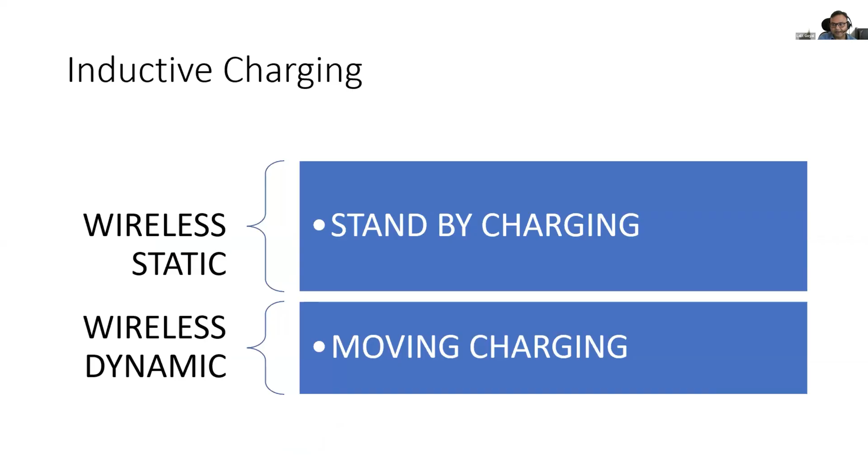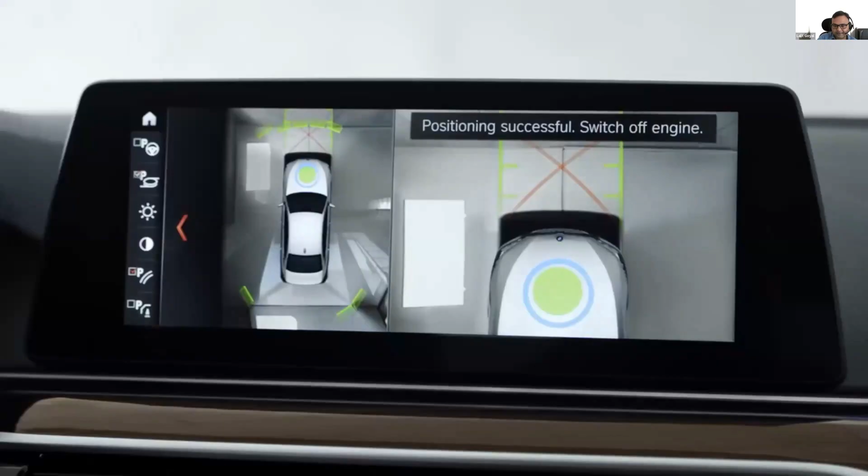Yes, we can. It's called inductive charging. Remember, the first was conductive, the second is inductive, where you don't need to connect the vehicle to the charger - it's called inductive, wireless. BMW was the first company to invent wireless charging technology called inductive. It works on the principle of induction, that's why we call it inductive. Here, technically what you have to do is park your car over the charger. This transformer technically works on this technology - even your induction stove works on the same technology. So right now he has parked the car over the charger. Now what will happen?

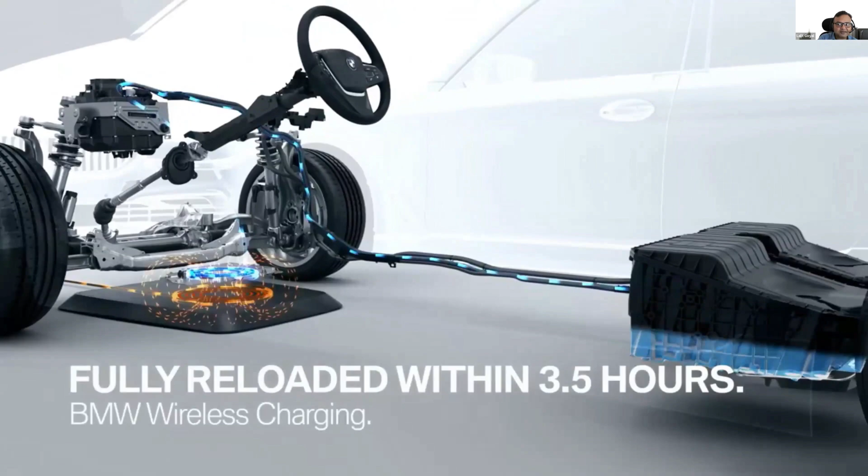A current will technically go inside the charger coil, and that will emit the current in the receiver coil, which is inside the vehicle. You can see the charger coil, and there's a receiver coil inside the vehicle accepting that current. This current moves through the vehicle's onboard charger because the vehicle and battery require DC current. This converts it to DC, the battery takes the DC current, and the battery is charging.

So you don't require to connect the vehicle to the charger manually. You have something called wireless charging technology. This is already available in India. Brands like Mercedes and others use it.

Here technically what you do is you have a grid, convert first AC into DC. Why? Because at your home, the frequency is fixed at 50 hertz, right? You can't do anything about it, so we convert into DC, then we convert back into AC to change the frequency.

Then we have charging roads. You drive the car and the vehicle is charged. These roads are there in France as well as in Germany, right? So coils are beneath the road. You drive the vehicle, and during the drive, the vehicle gets charged. Even pantograph charging is there, right?

Now, can you reduce the charging time to less than 3 minutes, or less than a minute? Range anxiety, right? What will you do?

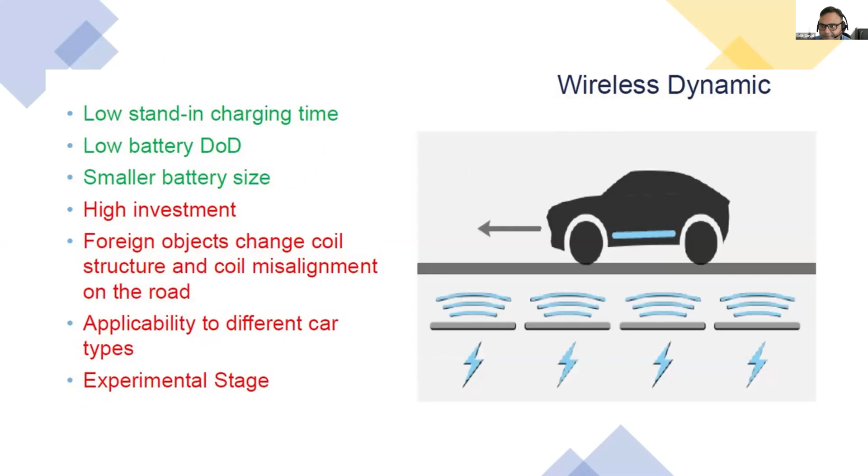We have a technology called battery swapping. In battery swapping, technically what you do is replace a discharged battery with a charged battery.

This is called mechanical. The driver will technically step down and go to the machine. First, he will communicate to the machine. The machine will open an inlet for him because that's a subscription-based thing. Now this battery will go inside. The machine will calculate if it's the same battery it gave to this person last time. Once it checks, the machine will give him the charged battery. It's called battery swapping, right?

As simple as that, less than 3 minutes. Now these batteries are manually easy to handle, the maximum weight they have is 10 to 15 kgs, so manually you can do it. But what about car batteries having 400 kgs of weight?

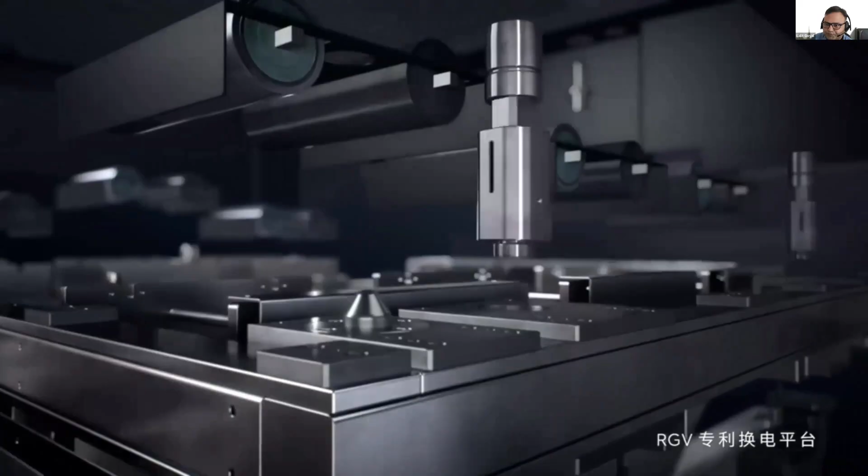Can we do it? Yeah, we can do it. Today we have the technology, man, right? We have lifts, so the same thing happens with these cars. We technically lift the discharged battery and replace it with the charged battery with the help of robotics and hydraulics. So open the battery pack, replace the battery pack, as simple as that. Put the fixtures back and done, you are good to go.

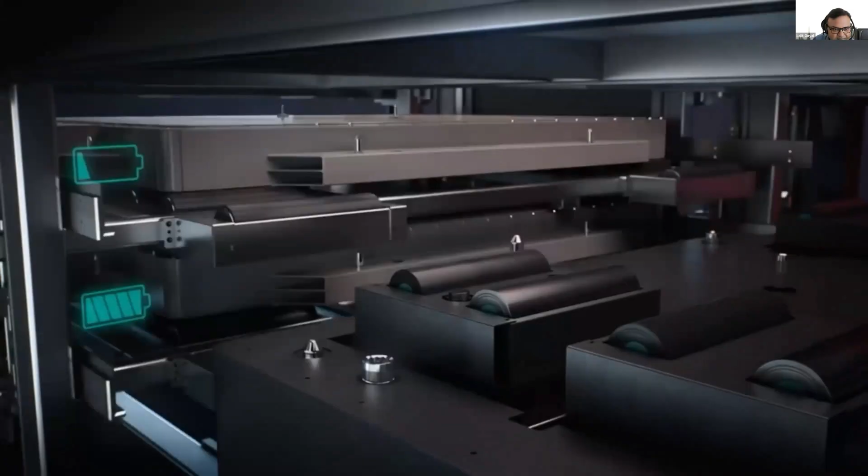So they open the vehicle frame, the battery frame. This discharged battery is on the hydraulics, going to be replaced by a charged battery. You can see the charge in both batteries is different, right? This battery has just a single bar, this one is fully charged. Now it will go and fit in the vehicle, and you will have a fully charged vehicle within less than 5 minutes.

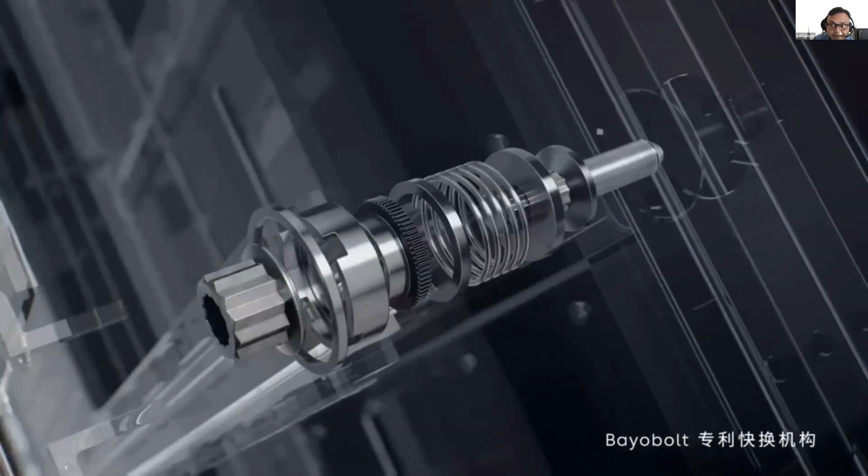This technology is coming in commercial vehicles as well as last mile delivery vehicles, for two-wheelers, trucks and buses using this technology back in India. But is it that feasible? It sounds invasive. It's not invasive. A car company called NIO has more than 3,500 battery swapping stations in the US and Europe, and I'm not even talking about China.

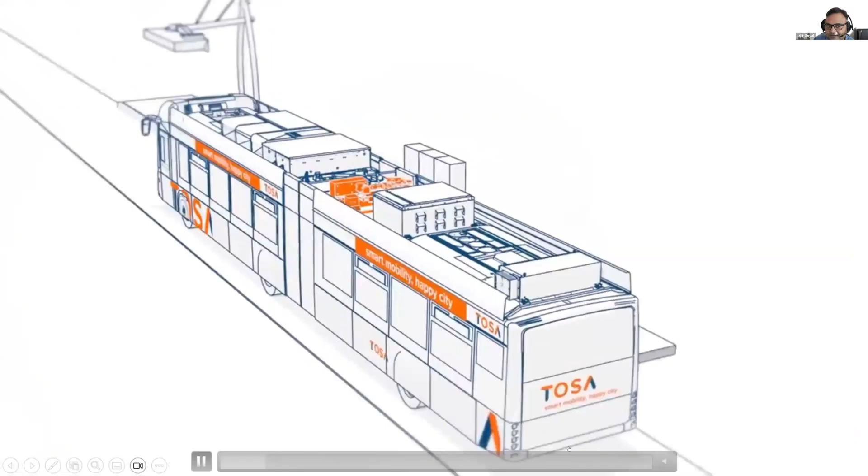So it's feasible. Now let's talk about ultra fast charging. Here technically what will happen is we will give 600 kilowatts of charge. How much? 600 kilowatts of charge in 20 seconds. This is called flash charging, where this arm will technically go inside and deliver 600 kilowatts of charge.

That means these vehicles, city buses, will technically travel, and at every station they go to, they'll get a charge for 20 seconds and won't require charging for the whole day. Drive and charge, drive and charge, as simple as that. So the charging technology has come a long way, right?

Now let's talk about the future vehicles - connected vehicles. The vehicles we have today have a limitation: if you have to update your vehicle, you have to replace it. But that has changed now. Just like your mobile phone gets updated over time, these vehicles get updated too.

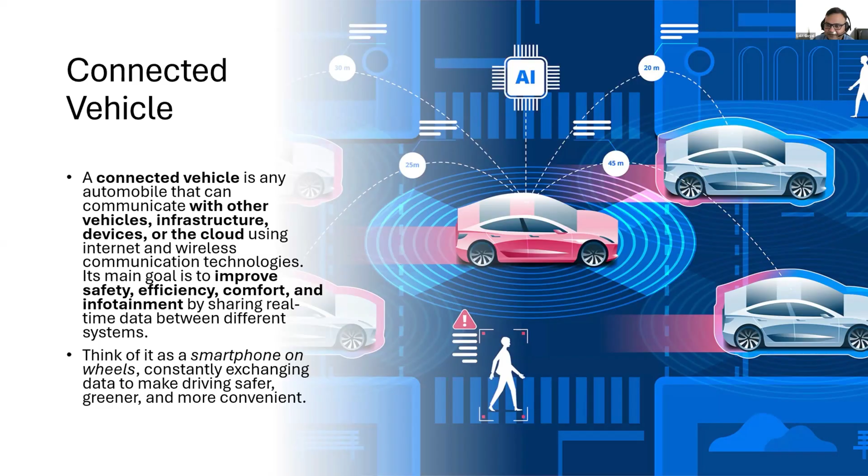Second thing, you can know the speed of the vehicle in front of you, and whether there's an object coming in front of you. So a connected whole ecosystem has come up, because traffic is caused by human intelligence or human anxiety. Technically, this will help reduce traffic and accidents, because we are moving to autonomous vehicles.

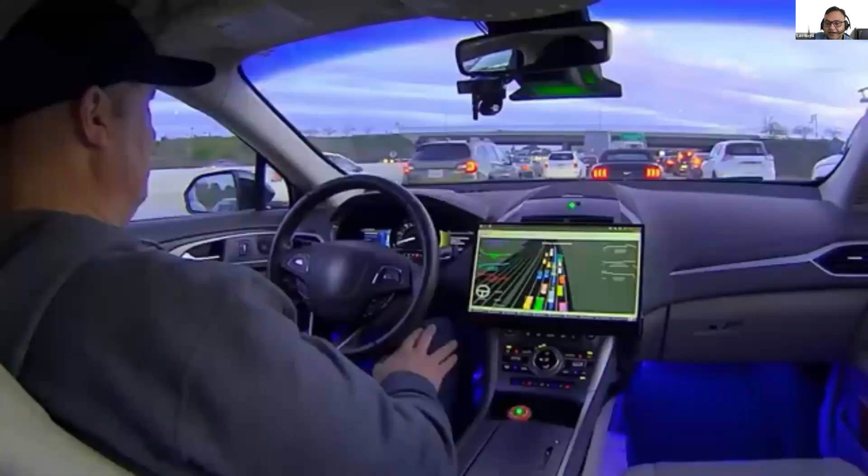A lot of sensors are used to drive the vehicle, and for safety, technologies like ADAS and autonomous driving have come into existence. Qualcomm has vehicle technology for vehicle-to-vehicle communication, where you know the speed of the front vehicle, the environment, traffic conditions, and if there's an accident. So all these vehicles, because of IoT and internet, have become connected.

These vehicles are connected to everything with the help of cellular technology and 5G. Today a pedestrian moving on the street and a vehicle moving nearby are both communicating with each other because of this infrastructure environment. So the pedestrian is alerted as well as the driver is alerted, resulting in reduced chance of accidents and reduced chance of traffic jams.

When we talk about wireless communication technology, we have a different role to play - the vehicle is now communicating with everything. A smart traffic system is there, so collisions are reduced and traffic lights are managed. Today we are in an age where we don't even need humans to drive the vehicle - we have full self-driven vehicles.

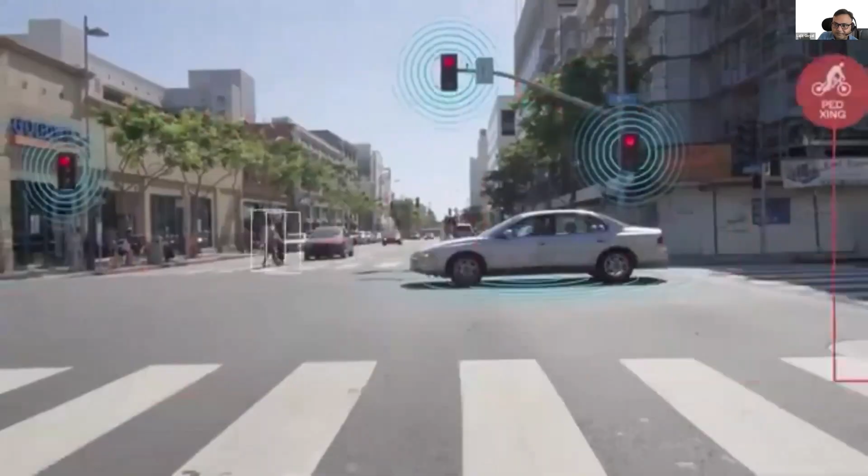If you see metros, the Delhi metros are technically fully self-driven vehicles, but they have a fixed route. Now we have vehicles that are fully self-driven, so infrastructure is also playing its role to connect this vehicle, because communication has to move outside from the vehicle to the infrastructure. In this image, the vehicle has advanced internet, which shares the information of the vehicle through internet to a cloud server, where the processing of information is done.

The whole environment comes into picture: data collection from sensors inside the vehicle, data transmission through internet, and data processing, because that data requires to be processed. When we say English, does the computer understand English? They only understand machine language, so they will speak in machine language.

Once this data is processed, a decision is made based on different patterns and previous data using artificial intelligence, because artificial intelligence is capable of doing processing which we humans can't do. With the help of a feedback loop, we are recreating the environment and the decision process in such a way that we reduce and address the challenges on the route.

So today we have vehicle-to-vehicle communication, vehicle-to-infrastructure, vehicle-to-pedestrian, vehicle-to-network, and vehicle-to-grid. Now this is very interesting - till now you've understood that you can charge your vehicle from the grid power, but when the grid is at peak time, you can use your car to stabilize the grid.